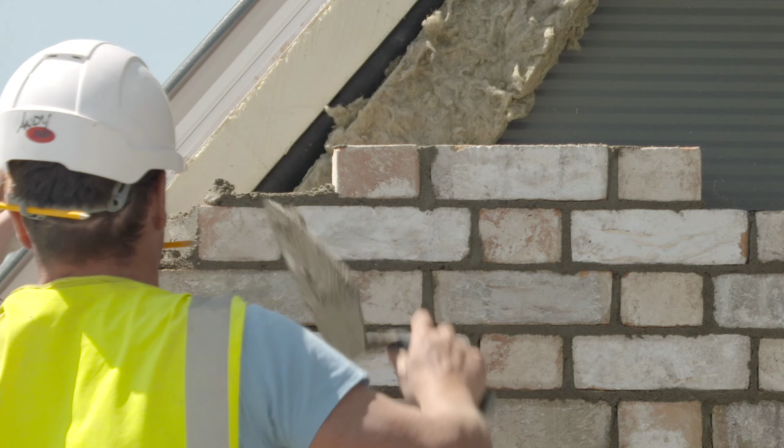But what is the real environmental impact of these buildings? Traditionally designed with concrete as the main structural material, their construction implies an increase of CO2 emissions released into the atmosphere, air pollution, and a rise in energy and water consumption.

These consequences call for the development of new sustainable strategies outside of the industrial comfort zone, such as the incorporation of wood as the structural element.

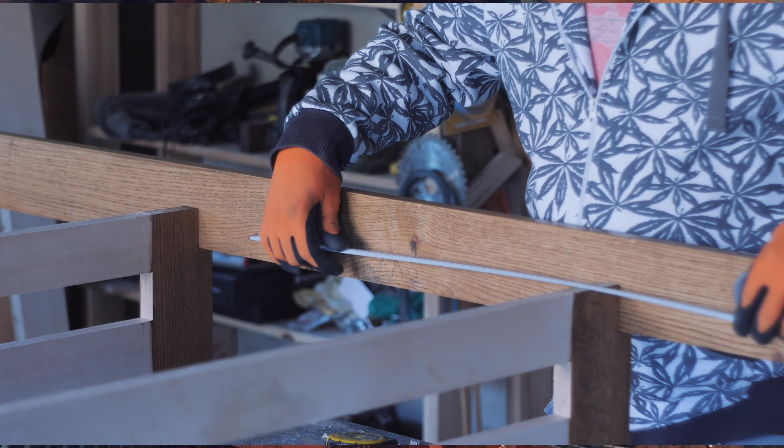Cross-laminated timber has emerged as a new structural strategy that Chilean architects have begun to incorporate into the country's architecture, adapted to local conditions and norms.

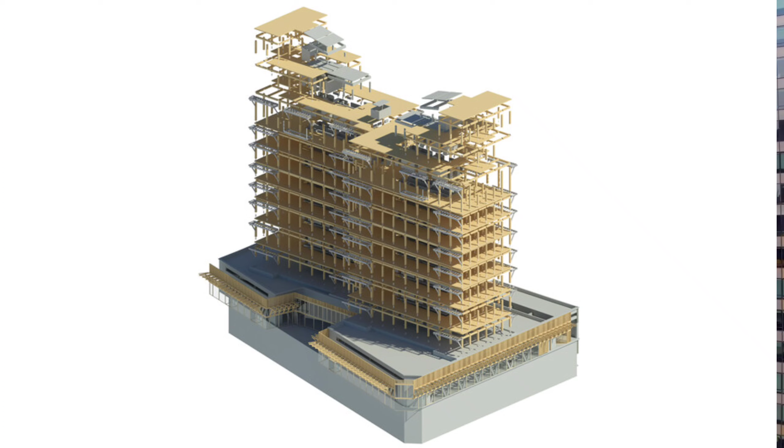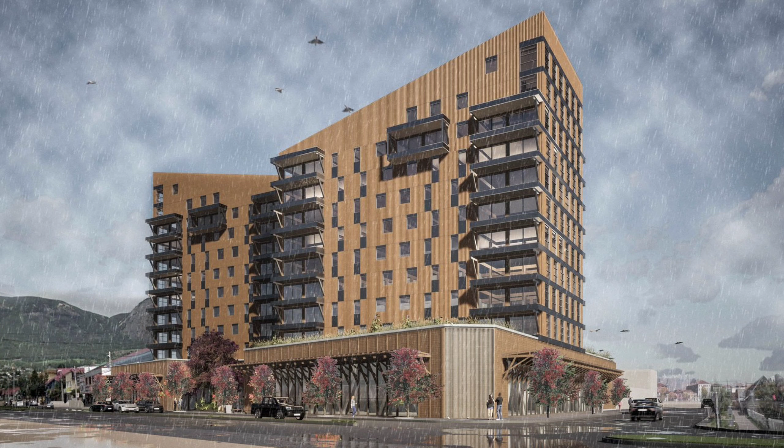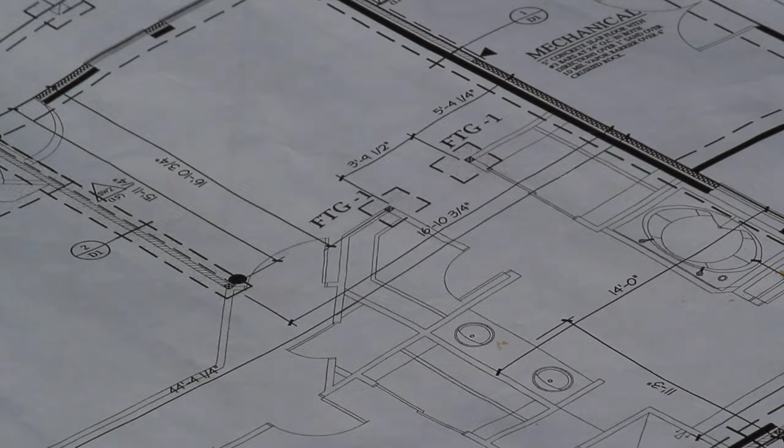The Tamango represents a step into sustainable solutions that follow an integrated design process through all the stages of an architectural project. Tall buildings in CLT already exist around the world, demonstrating that using wood as the main structural material in high-rise buildings can be the future.

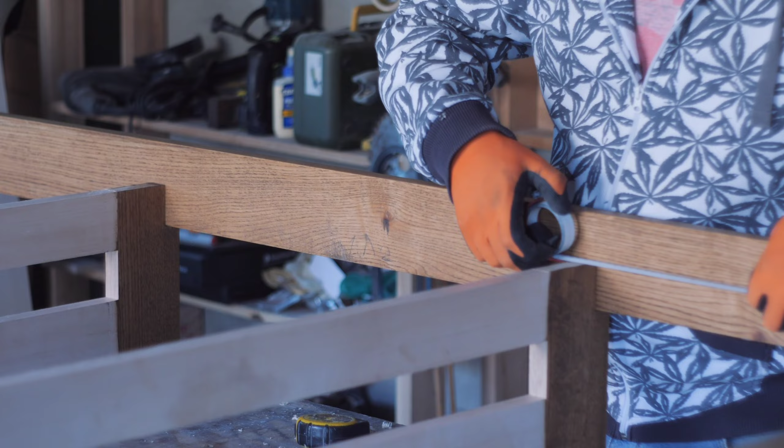Besides being a renewable source which cannot be depleted and is able to supply a continuous source of clean energy, wood provides sustainable solutions that, combined with technological advances, cover all stages of its life cycle, from its fabrication, assembly, and application. During its fabrication, each kilogram of wood captures 1.8 kg of CO2,

and its assembly needs a dry construction that is silent and does not generate waste. When inhabiting the building, wood has excellent thermal and hygroscopic properties, which contribute to its energy efficiency and user comfort.

The local conditions of Coyhaique, Chile, where the burning of damp wood for heating interiors releases a great deal of CO2 emissions, has made it one of the most contaminated cities in Latin America.

In response to this, the Tamango's goal was to propose innovative solutions within two main lines: to be sustainable and to develop an efficient construction system, always considering the difficult access to materials and workforce in the area.

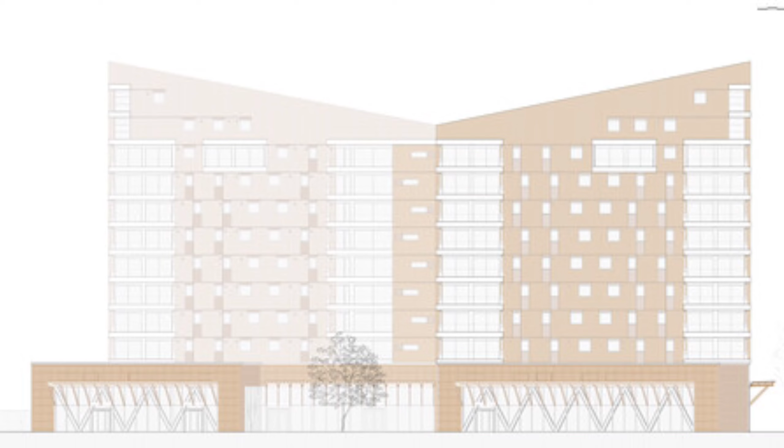Inverting the traditional process, the Tamango's design incorporates a multidisciplinary team integrated by structural engineers, fire resistance, energy efficiency, and acoustics specialists that analyzed all the possible outcomes from the beginning of the process.

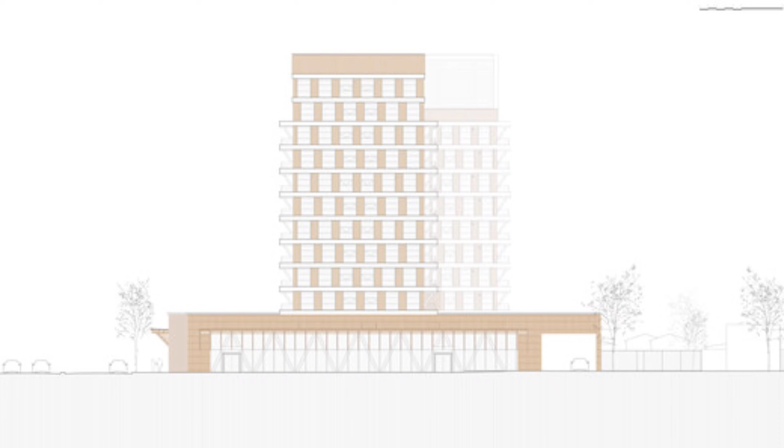Simultaneously, the project developed a study of thermal envelopes with experts in energy efficiency from Chile, Finland, and Canada, aiming to create a high-rise building with sustainable strategies that help with the decontamination of the area.

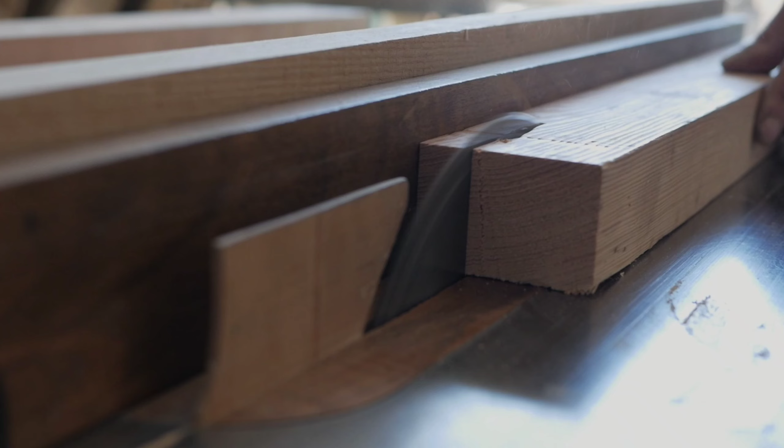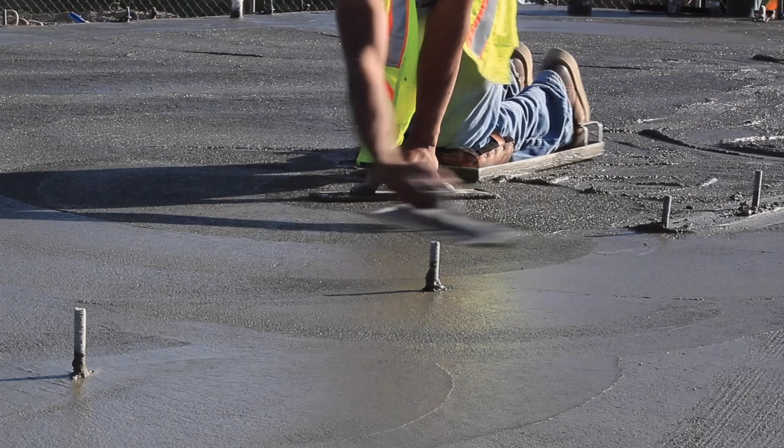Using the latest innovations for joining wood layers, mass timber products, also known as compressed layers of wood that create structural load-bearing elements, can have adjustable sizes created for panels, posts, and beams, all of which enable a high-strength system, much like concrete and steel, but in significantly lighter weights.

The Tamango's structure was developed by previously designed wood elements CLT, LVL, and glulam, together with certified sawn timber with different structural degrees. According to the Engineered Wood Association, CLT prefabricated panels are composed of several

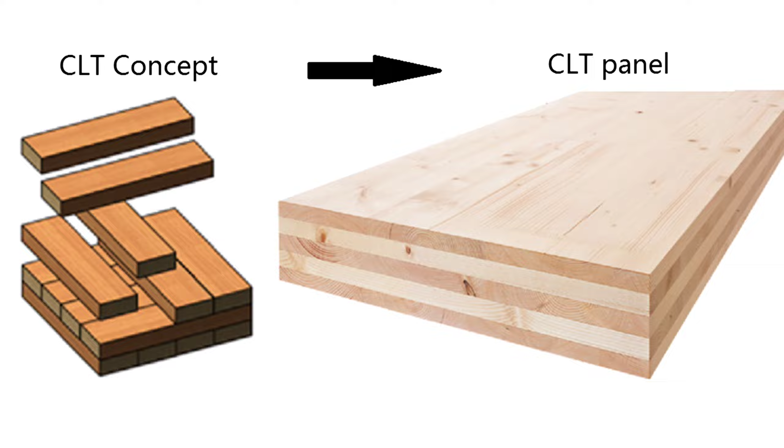pressed layers, usually 3, 5, 7 or 9, of kiln-dried lumber boards stacked in alternating directions, joined with structural adhesives. Maintaining a right angle when gluing these layers gives the panel structural rigidity in both directions.

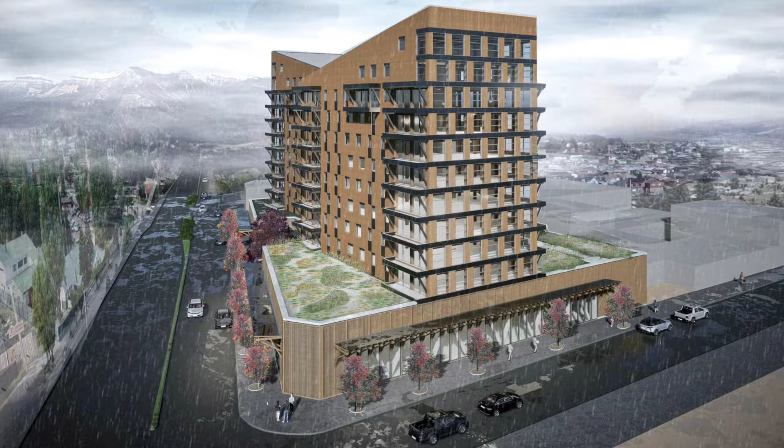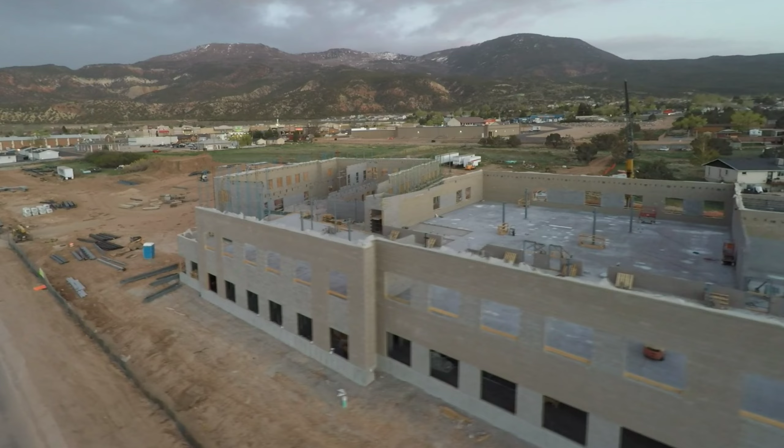To achieve accurate prefabricated structure results, the project worked with a previous building information model, where the team detailed every panel and their future assembly. Once on the construction site, these panels were rapidly and efficiently joined together, much like a puzzle.

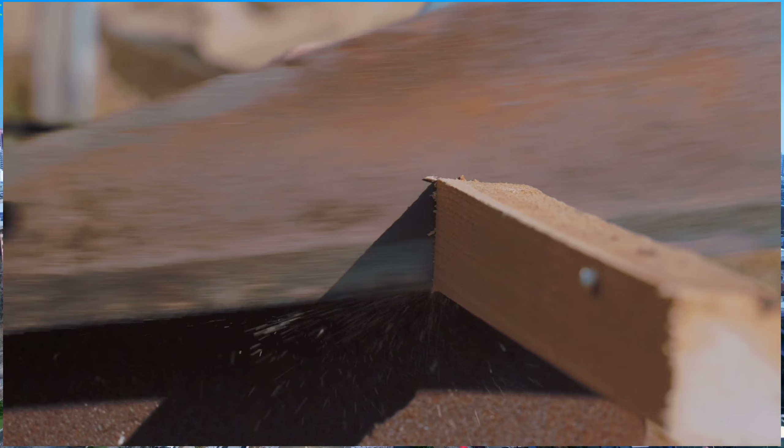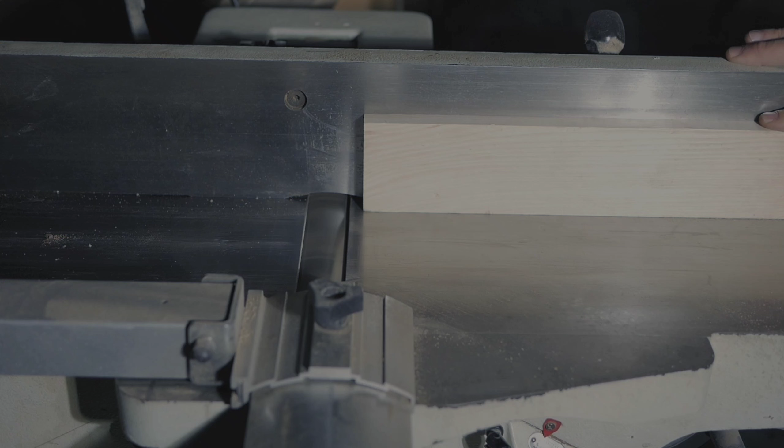As a complement to CLT panels, the strategy incorporated laminated veneer lumber, a construction material produced by dried and graded wooden veneers that are bonded together under heat and pressure in large panels that are usually used for beams, trusses, planks and rafters. Despite the process obstacles, for example, the lack of progress in the Chilean code for high-rise timber

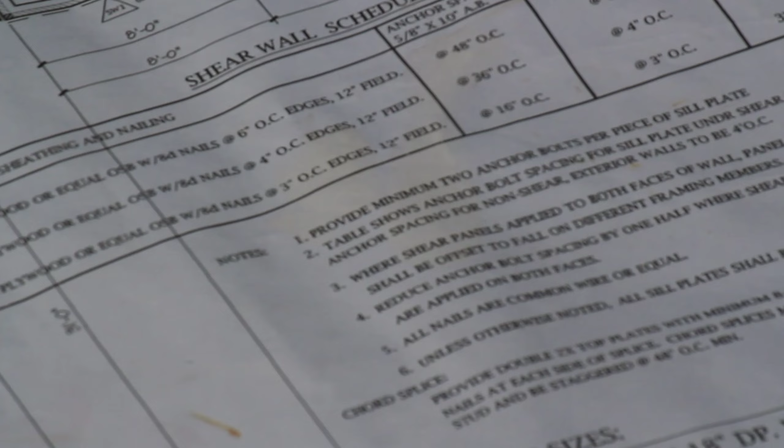structures with more than 5 levels, the 1,870 cubic meters of wooden structures captures 1,230 tons of CO2, which already surpasses the emissions due to its fabrication and transportation.

During the design process, it developed an energy-efficient strategy that created heating from electric pumps and a thermal skin that saves 75% of the expenses in monthly heating and 60% of energy savings in contrast with equivalent housing projects.

In addition, if the building's life cycle comes to an end, its structural elements are easy to disassemble and become available for reuse in future projects.

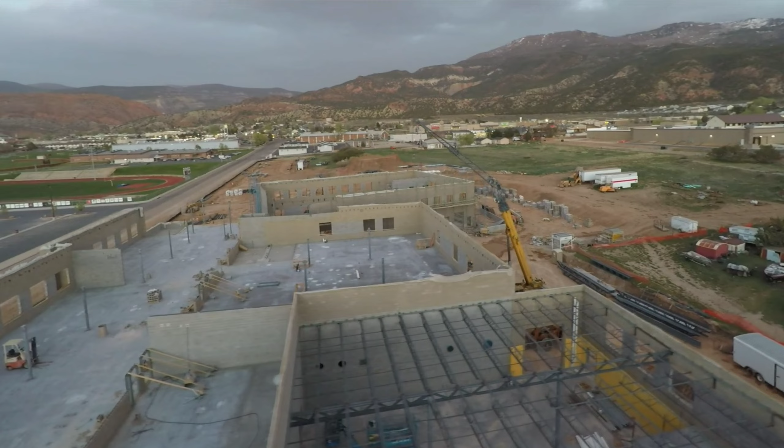As a regional pioneer, Tamango takes the first step and establishes itself as a model for future architecture projects in Latin America, where height is no longer a problem for wood structure systems.